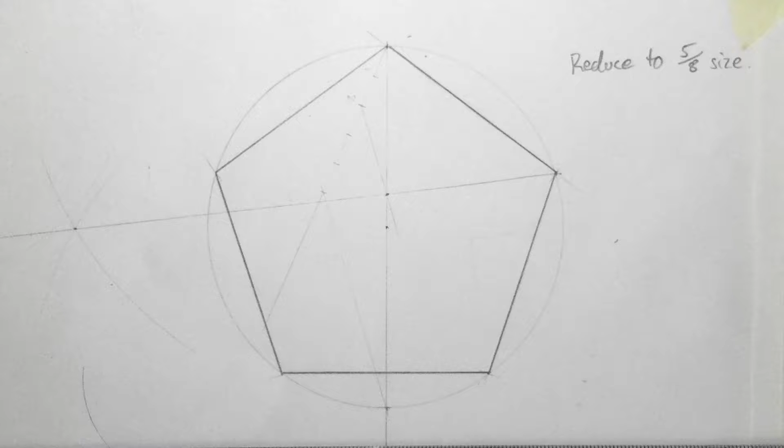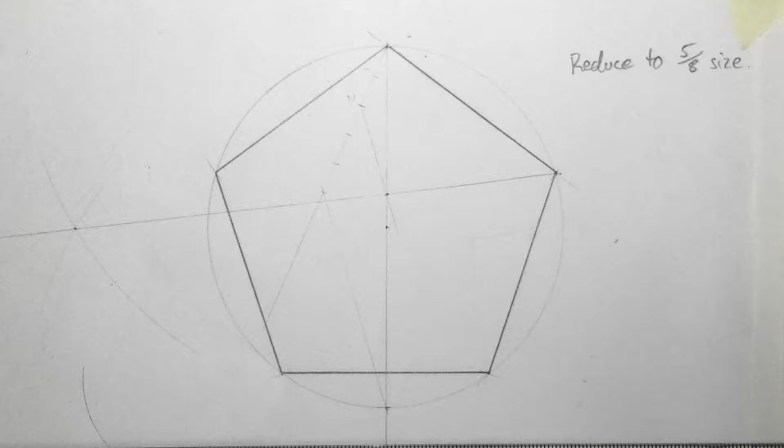Hi guys, in this clip we're going to look at how to reduce the size of a polygon. In this case I've got a pentagon here that we've created earlier, and this one asks for us to reduce it to 5/8 of its size. So reductions are quite simple.

First thing we're going to do is we look at one side, so I'm going to look at the base line down here. And if we want it to be 5/8 the size, what I need to do is divide this line into 8 parts, 8 equal parts, and then look for the 5th part on it. So let's go. Random line out, grab my compass, and we will set this to any given length. We want to do 8 parts, so we don't want to go too big.

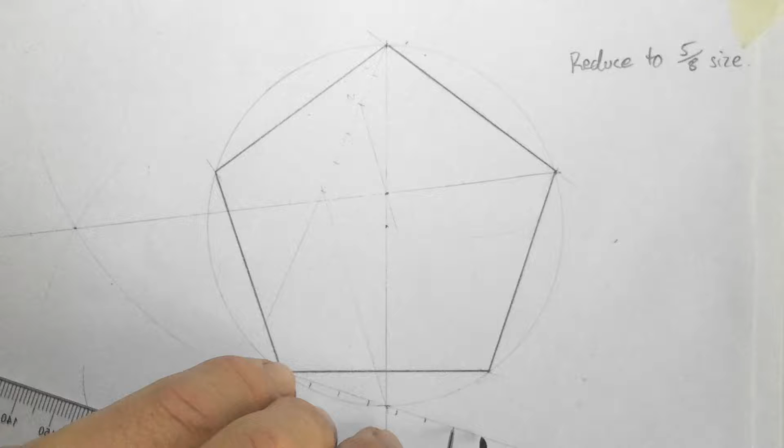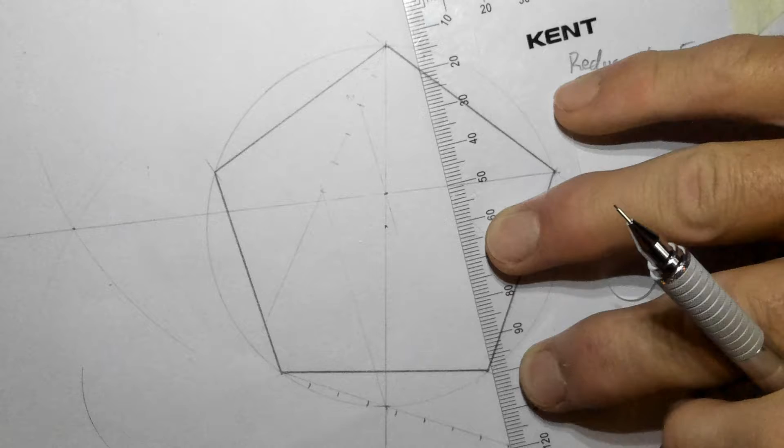Starting on the end there, 1 mark in, 2, 3, 4, 5, 6, 7, 8. Taking that last mark through to the end, you have to try and work out the best way to do this. Using my 2 set squares, it's always pretty fiddly. And come around, getting the last one to line up.

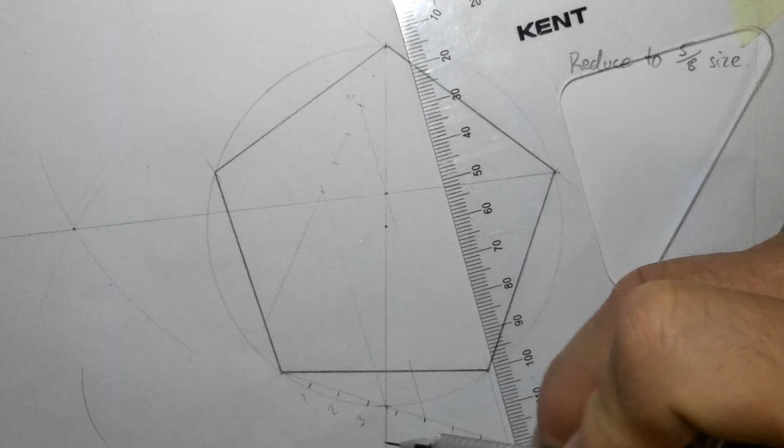So that's our 8th one. There'll be our 7th, 6th, 5th one there. So we don't have to take them all through, we just take through the one that we need. So there we've got, that's 1, 2, 3, 4, and 5 is that one. That gives us 5/8 of the size. So this is going to be our new starting length for our baseline.

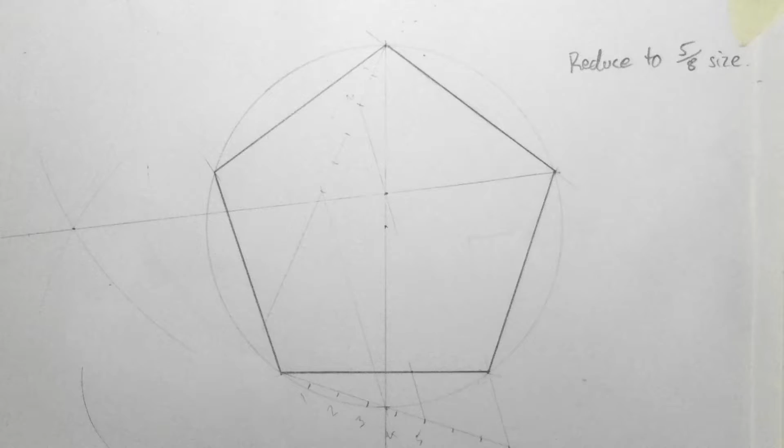The next thing we need to do is take all of these points that are run around here back down to the start or the left hand end of our baseline. So we're just going to run this down here, because when we resize this, these points are just going to all shrink back down in. They're just going to pull back down in, and they'll be on the same coordinate line. So I'll just take that point there and that point there. Back down. So I've got a line through there and a line through there.

Now what happens when we shrink it? All our edges are all going to stay on the same angle, okay, because we've always got the same degrees down in here for each of our polygons. So let's get that angle sorted out. So here we are here. We've got that angle nice and lined up. I can use my 2 set squares here, and just slide it along to keep my angle. I come down to the end of our 5/8 length, and I take my line up.

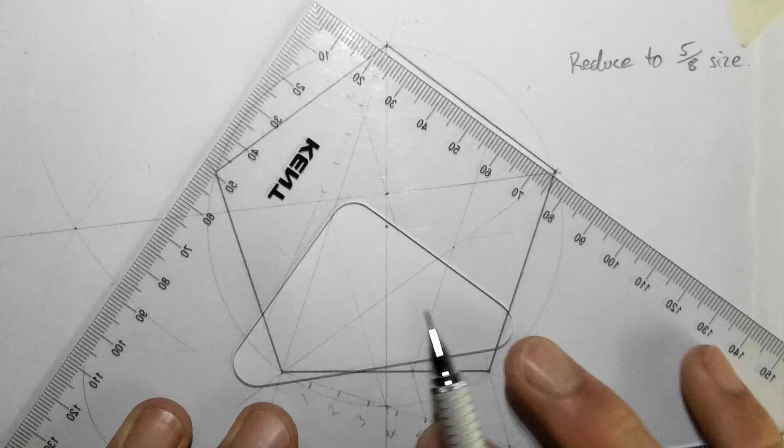Now where that hits that line coming from that point down there, because this was the old end point of our line, now the new end point of that line has been shrunk down to be right there. So we have a base and then our first side coming up. Then we need to take the next one up this way on the same angle as that. So let's get some 2 ruler method going here. So just sit that on there like so, line it up so it's perfect angle. When it's right, slide it back in until you get to our intersecting point there, and then we'll take it up.

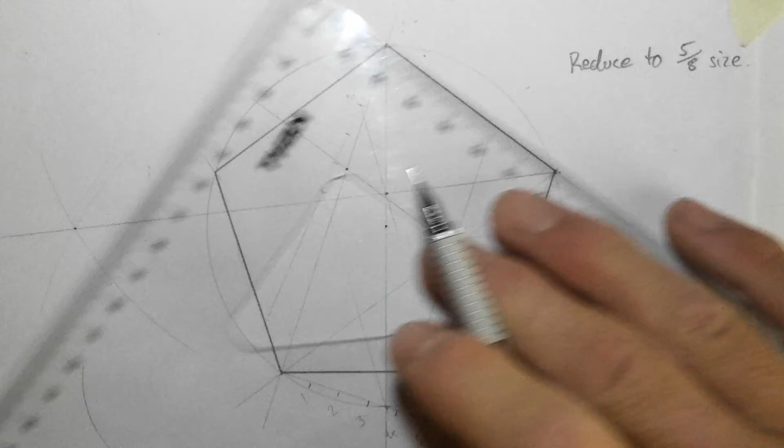So now we have base, side, our other side comes up till it hits that line down there that goes down to the point. So that is our next point there on that intersection. So we go up that way. Now it's got to come back down on this angle till it hits this line. Let's work out our angles again. Line that up so it's pretty perfect. And slide along the ruler back to the intersection. And that's our line through there.

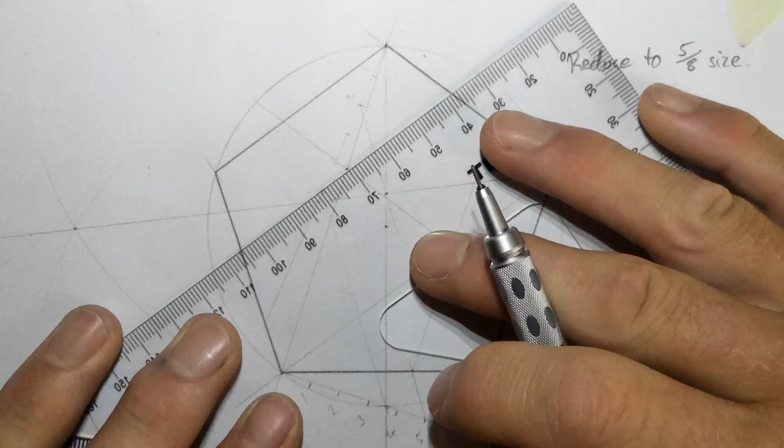And you can start to see it here now. Base, side, side, side, side. So I'll just draw that in my outline. See where it is. And there is my reduction down.

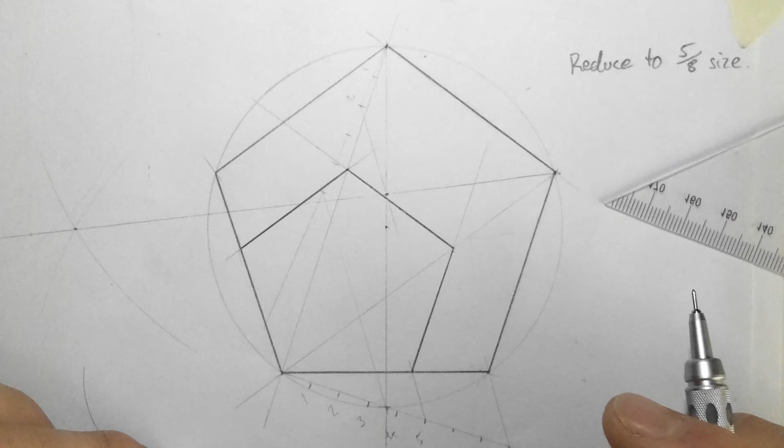Now this will look a bit distorted to you. It always does when it's sitting inside another pentagon. If you actually block out the old pentagon, it will look like a pentagon too. But when you put that one there, around it, it makes it look like it's a bit distorted. Gives you an optical illusion.

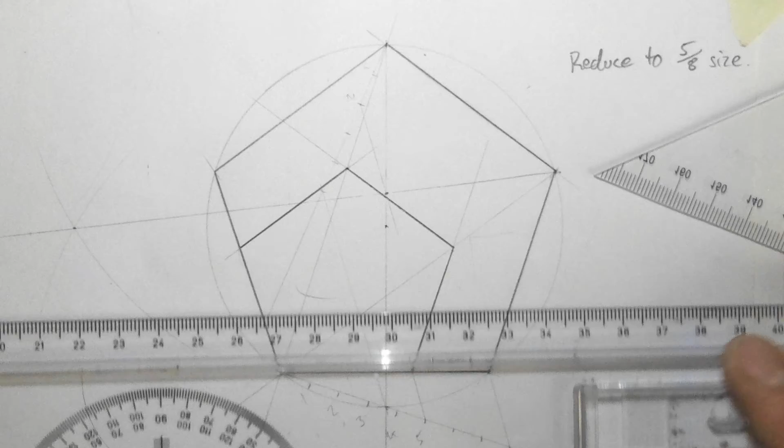So that is how to reduce a polygon down. If it says that it's 1/2 the size, you would just divide your base into 2 and use one of those 2 and then start your angles up. Remember to bring all your corners back to the end of your starting baseline.